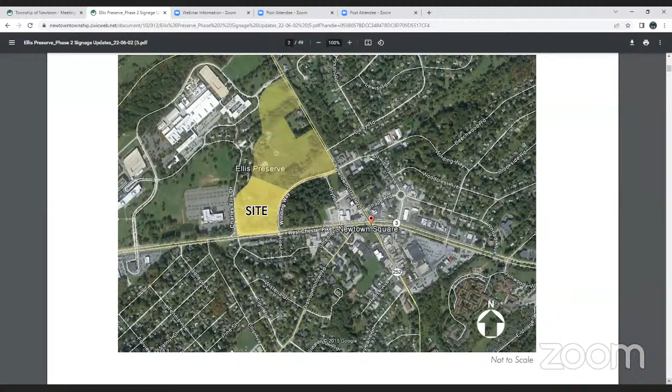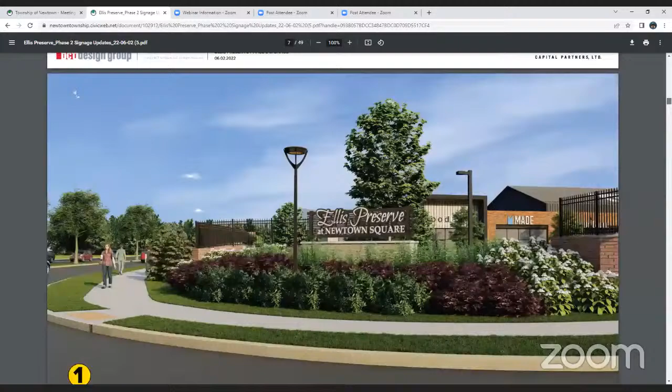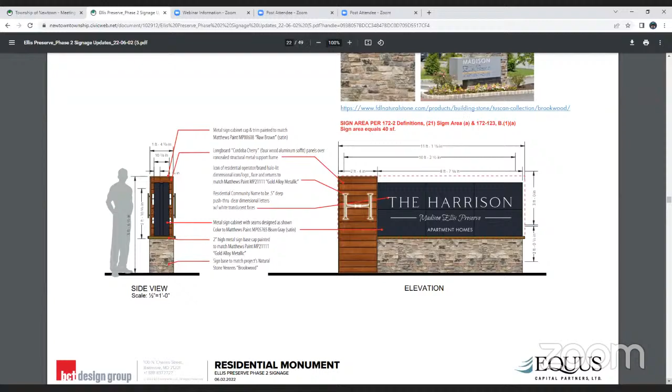They pulled up a view of the south elevation from the street showing the secondary signs in the back of the buildings, which are being tabled for now. Those areas aren't fully thought out yet; they're exploring ideas of bringing in the history of Newtown Square and Ellis Preserve. Some secondary sign locations are in alleyways and are meant to soften those areas, but they're comfortable coming back with more developed plans later. So those two areas, shown in what's being pulled up, are the secondary signage areas being pulled from tonight's discussion.

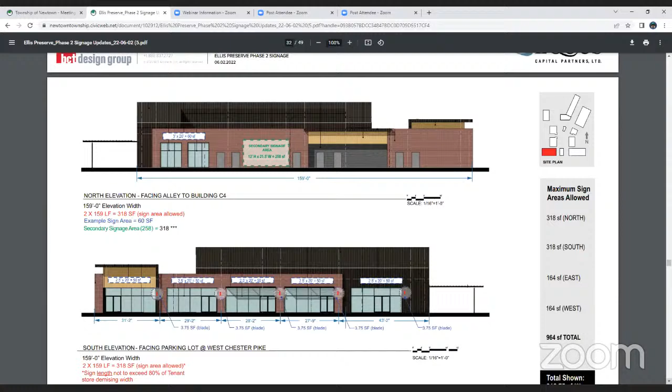They reviewed the monument signage and the view from the south elevation from the street for the multifamily building. There are two elevations, a south and a west elevation, that both have the H for the Harrison on the upper facade.

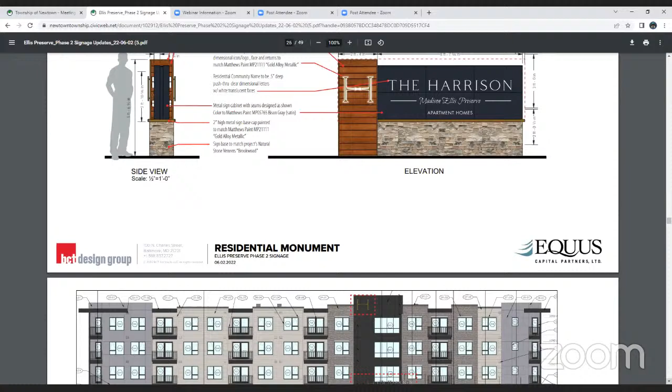Correct, not the ground sign, the residential monument sign. We're having it go the other way. Okay, there it is, right there. Perfect, all right, so that is now established.

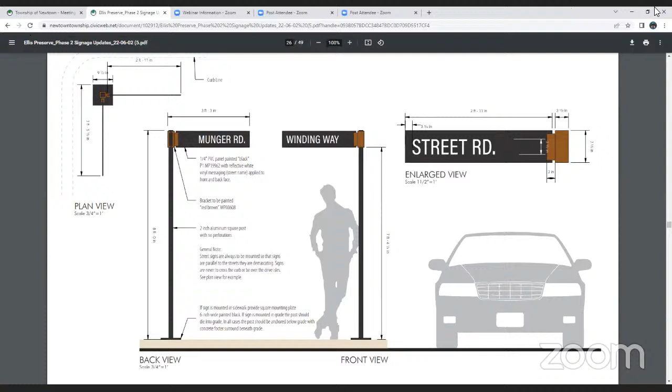Mr. Russo, I believe you had some questions. So the monument signs, there's 3 or 4 of them around the complex. They basically just have different veneer on the bottom of them, John, where we're at. So they're all supposed to have the same stone veneer on the bottom. I did notice, they look, the one looks a little different.

So there is Brendan Murray, BCI. There is the current campus signage. We're continuing that along West Chester Pike and at the end of Winding Way. But then when you get to Newtown Street and Winding Way, we are matching the retaining wall stone at that place. So, on the screen right now, that's the one at 252 and Winding Way, correct? No, that's Newtown and Winding Way. 252 and 1, yeah.

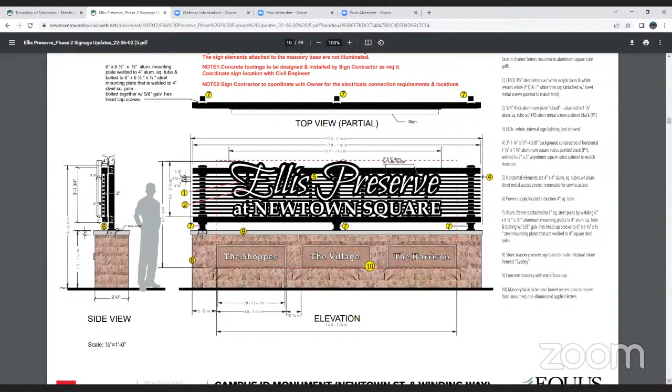It's Newtown Street. Is that what you're gonna be calling them, John? So you're dividing the 3 sections up into the shops, the villages, and -- don't move from that, you can go back to that, Steve -- the shops, the villages, and what's the other one, the Harrison? Harrison, is that what you guys are calling them? Yeah, I think the village is a placeholder at this point, the name hasn't been set. Rockwell's development -- the townhouse portion of the project.

Why have it like that for 252 and Winding Way and not on the West Chester Pike side? The West Chester Pike side represents more of the entire Ellis Preserve campus, and this represents more of the retail and mixed use. It matched -- the previous one matches more of the signage that is already existent on that side of the project.

Got it, and these signs are all backlit. They have no front face illumination -- what was that? No front face illumination, so no light will be coming forward. It is a reverse channel, so it's basically halo lit. All right.

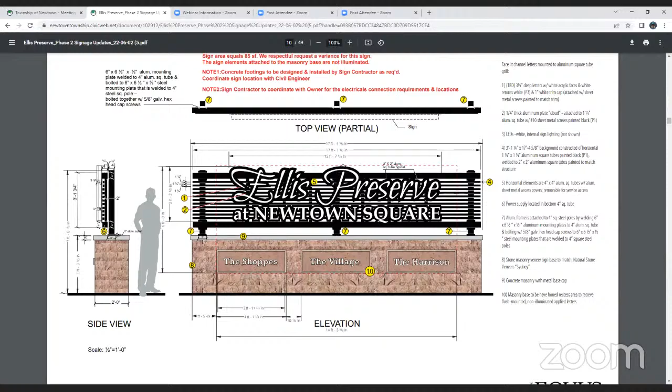Like backlit, and then the tall monument, the retail pylon, is similar to what you have already. Yes, it's a slightly different variation -- right there. Each user will have its own little placard, each tenant, similar to what goes on now at the other site. Same materials, just a slightly different proportion.

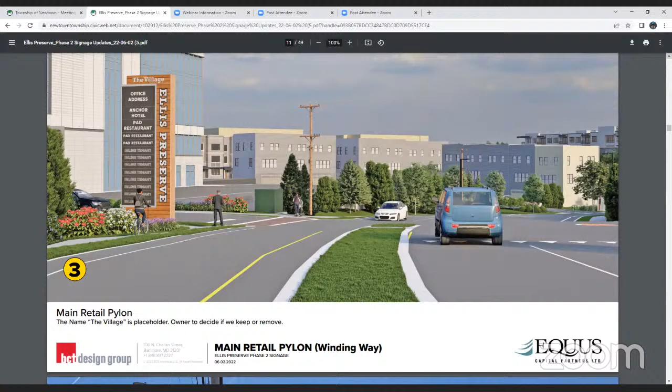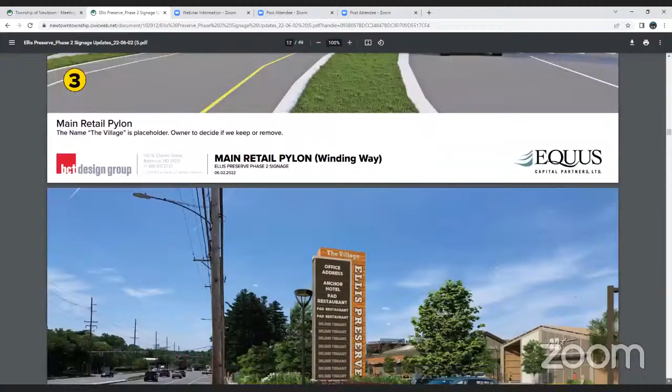Okay, and then -- you have one for the garage, and then one for Finley Catering. Is there one for Finley or two? One, it's just two different drawings.

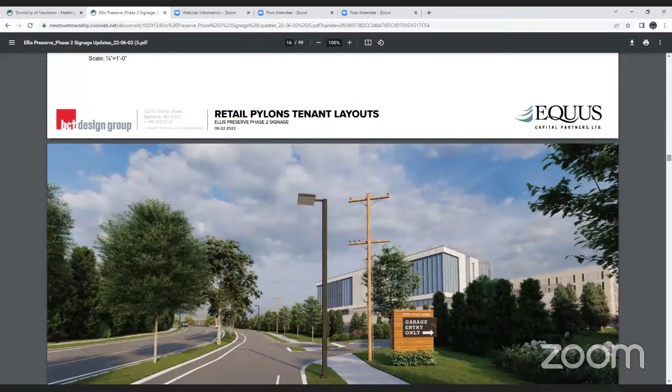Look at the Harrison House. And then when we talked about the other signs, I thought you did a good job with the different types of signs you can have across the front of the different facilities. You showed a bunch of different options depending on what kind of facade they have. There's a few different options -- you can go with channel letters, cut letters, freestanding letters, exterior variety, illuminated -- I think that was a good representation of the options we could see.

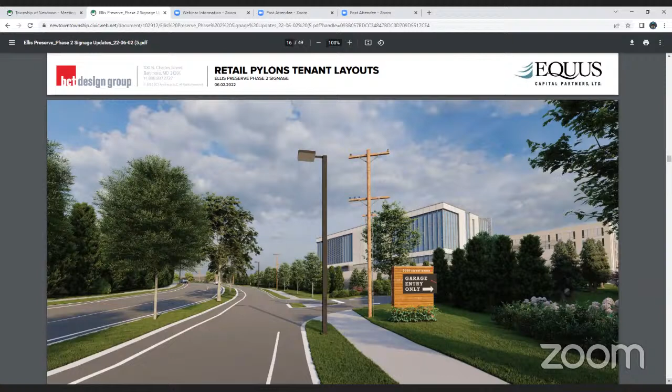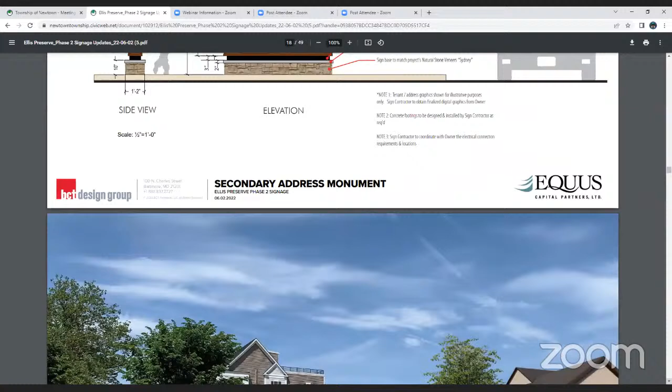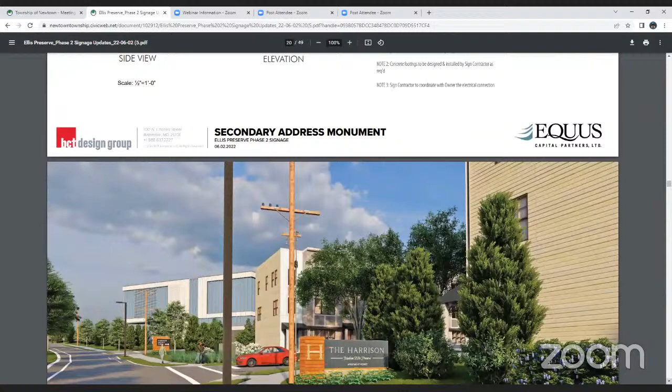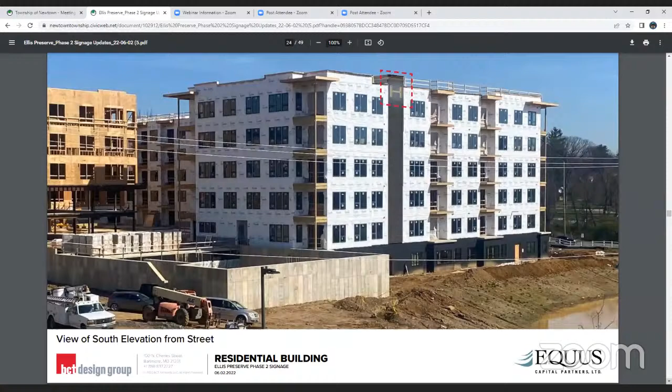So then these names are just representations -- these are not any of the tenants that are here today. Like you have Kirkland's, obviously you're not putting a Fridays in because they're all going out of business. So stuff like that is just options, examples. Yeah, okay.

Any questions? No, good.

Well, before I get into my questions, is there anything you want to show? Anything specific, or did you want us to just run through the package?

At the board's suggestion, we included renderings of exactly what the pylons will look like with the exact landscaping that will be planted in those areas for Winding Way, 252, West Chester Pike, and Charles Ellis.

This is good because all the different signage that's going to be on the front of the building is where everybody in the community will see it. There's a lot of variety—so if Sam's Pizza comes in and wants this sign, and Joe's Bar wants that type of sign, it gave us a representation of about 10 different ones, somewhere around there.

The only comment I have is going back to the one we established for 252 and Winding Way, or Newtown Street Road and Winding Way—having the shops, the Village, and the Harrison listed at the bottom.

I think it looks nice without it. I get what you guys are trying to do, but I'm not an architect, and I think it does the opposite—it actually secludes the development as opposed to it being one giant walkable community.

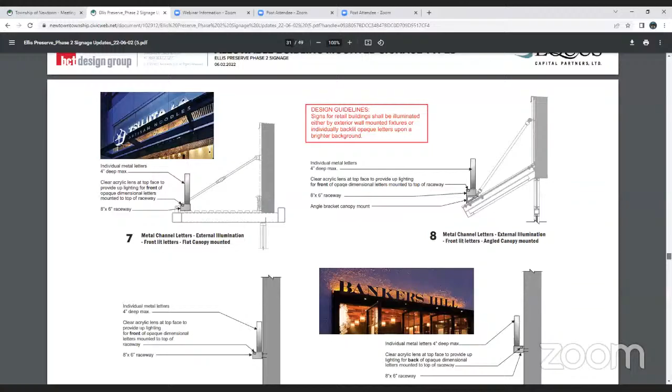I think it was mainly to serve the residential component. They wanted some signage, especially since we're taking away the H's, and some recognition at Winding Way.

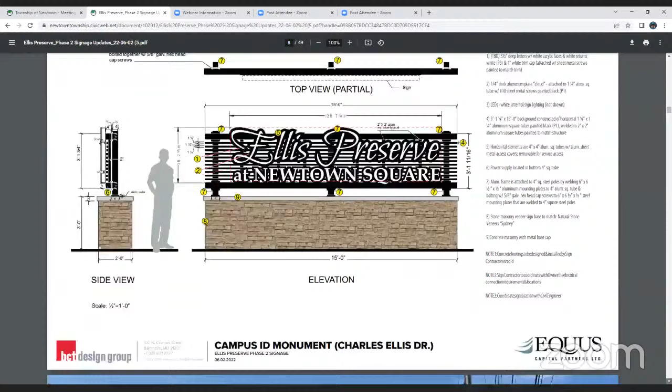They're going to see it anyway, so I don't think it'll be hard for them to know what it is. Are those going to be illuminated? No, those are just going to be like a graphic on the bottom.

Is that out of stone, or something carved? It'll most likely be a veneer matching the rest.

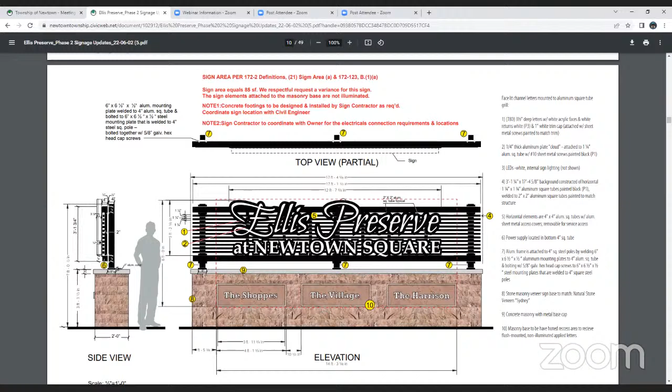So it's not going to be lit up at night or anything? My concern isn't that it's going to be lit up—my concern is that it's a lot to add there, and I think it's contrary to what we've been told, where we want one giant uniform walkable campus, unity I should say. I just feel like we're highlighting three sections.

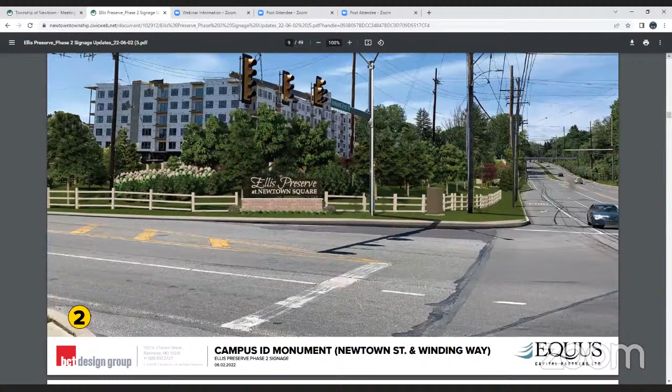Let me look at it again, we'll come back to you on that one. But I like the sign itself—the signs are nice. I don't know if we could move forward with the overall sign area as is.

Does it actually have The Shoppes, The Village, and The Harrison written on that, or no? It does. I can't see that from here though—that's what I'm saying, it's hard to see. I appreciate you doing the schematics showing what it will actually look like, as we discussed. I think it looks good.

Any other questions from the board? Just a comment—I know you're tabling the H's, but just to note: having those big H's lit up, in a community with townhomes, people would be looking out their bedroom window at the big H.

Not so desirable—I don't want it to shine into your bedroom. Not so, not so desirable.

I know you said table it, but just to clarify, those aren't front facing—they'd be backlit, like halo lit, so it's a soft glow around the edge of the sign, barely noticeable except on a dark night given the height where they're at. It's like the Batman symbol—if it lights up, someone's still going to pop up out of nowhere to save us.

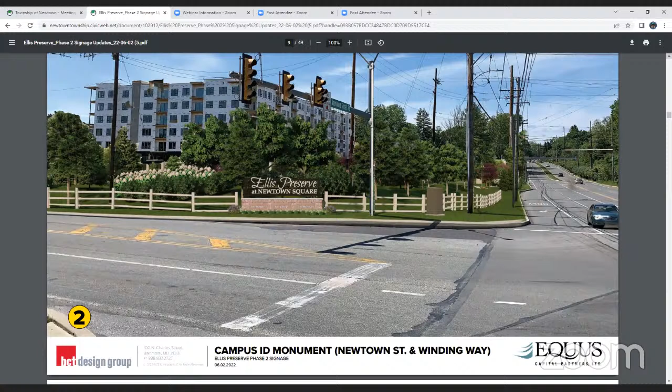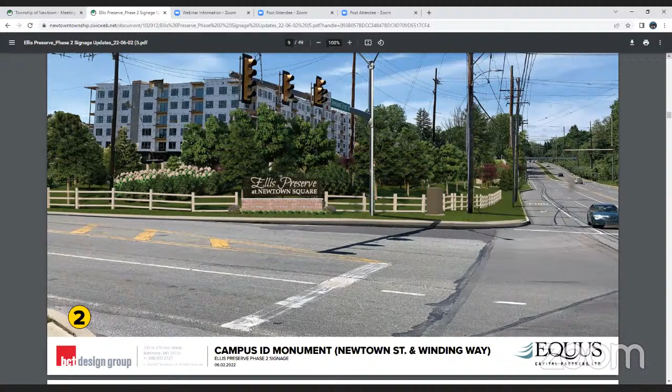And John's gonna revisit the sign 2 at Winding Way, in relation to the bottom sign. Yeah, the sign itself is individual signs at the bottom, that's fine. He's just gonna revisit that. We'll talk about that later.

So this approval is subject to submission to the zoning officer, the township engineer, and the building department.

Second. Good job, Rich. Motion was made by Supervisor Russo. I believe Suzanne, you got all that down. Seconded by Supervisor Partridge. Before we vote, is there any members of the public who want to add anything since this is a presentation?

All right, seeing none, all those in favor signify by saying aye. Aye. All those opposed? Motion carries.

We will now move down to old business 17.1, discussion and possible decision relative to BPG rendering PH2D, the new office building in Ellis Preserve, previously approved building architectural changes only.

Thank you. I have John Schwartz with me from DII Architects. John is the designer for the project. We were here roughly a month ago and had a discussion with the board on the renderings presented that night, and the board had some suggestions they would like to see. So John's here to present the updated renderings for the project.

Good evening, John Schwartz. So the first slide we wanted to show, since I know there was some question on orientation of the building, is really just to represent where the building actually sits on the site relative to Winding Way. And if you scroll up a little bit...

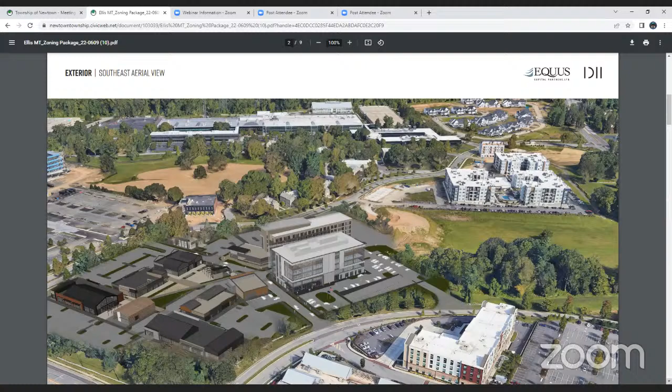You have these as hard copy or no? Did you bring any hard copies? Do you have hard copies? I didn't bring any, but I have a hard copy here. Yeah, can I just have that, John? Yeah, 'cause there's a comparison, I believe, from the original. Thanks.

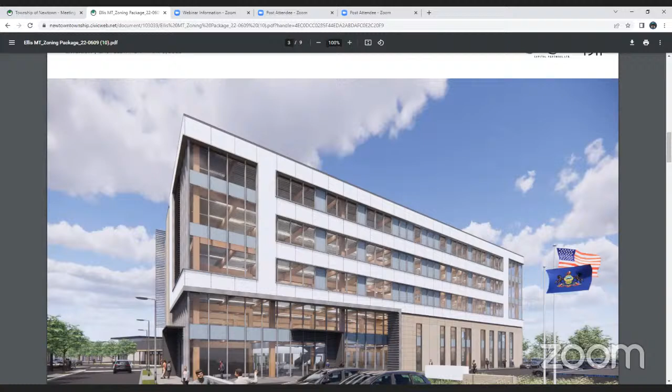The next slide shows the parking lot elevation, the east-facing elevation. So this is where we were at the last meeting. Some of the concerns or recommendations were regarding the amount of white and the starkness of the white, and I believe also the color of the base, which was a little tan.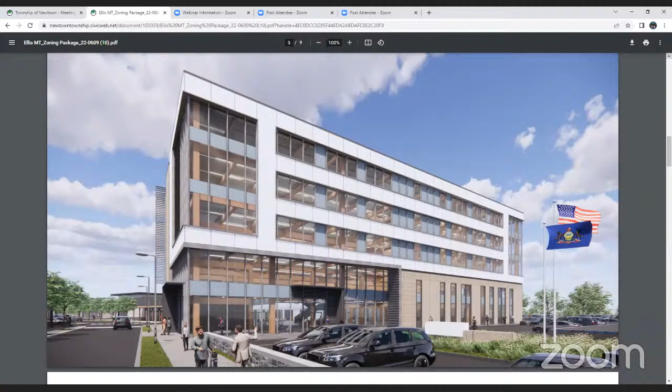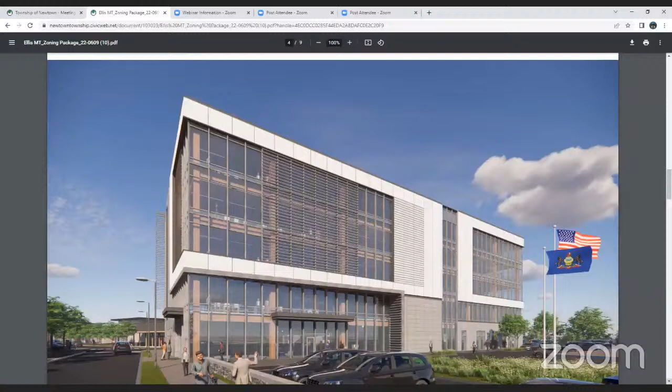We've been working with the client through the design process and evolved the elevations. The next slide will show what we did to respond to what the board mentioned. So instead of the section of white going all the way across, we've separated it, trying to break down the facade a little bit more, and also toned the base, changing it to a medium gray to kind of blend in with the white.

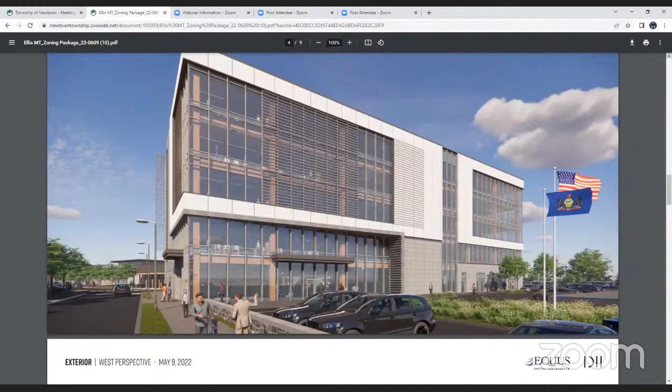Is the curtain wall wood or aluminum? The curtain wall is aluminum, but you're seeing through the glass, which will be kind of clear. The intent is that we want to see a little bit of the wood structure behind the glass, trying to celebrate the mass timber a bit.

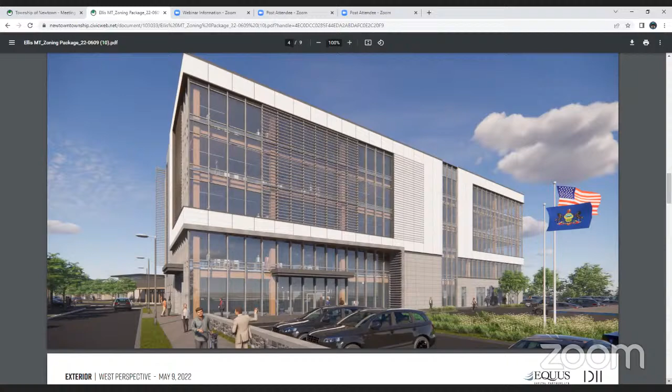Is the representation showing certain pieces of glass that are going to be darker, or is that just a reflection? Just reflections - we'll have reflections of the sky and buildings, and this is a computer-generated rendering as best as we can represent it. This is believed to be how it looks from Winding Way. Yes, okay.

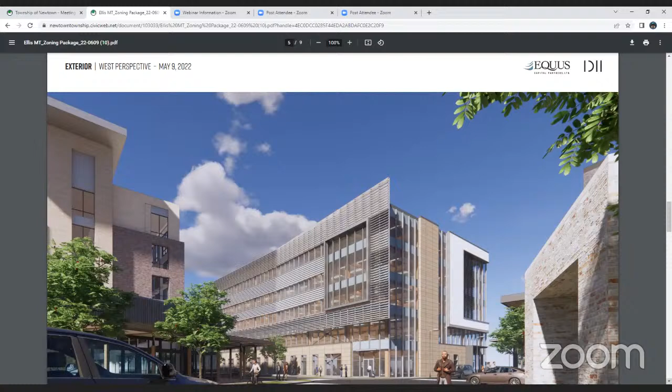So the next view was from this angle - this is the north and west side of the building, where we have curtain wall, and then in front of the curtain wall we have the brise soleil.

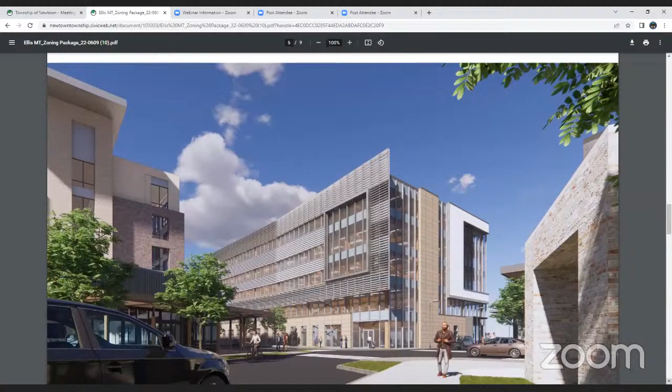The next rendering shows the same view, where we've incorporated a little bit more of the color. We got a better rendering of what the glass is going to look like, and the entire brise soleil is now in front of the curtain wall. So this is the revised version.

So part of what we're doing with the brise soleil - for those not familiar with the term, it's a sun shading system. It reduces the solar gain on your building, and we're using it as a texture as well. It's a high-tech look, but we're also going through evaluations with our envelope consultant and engineers on using the brise soleil to tamper down the solar gain on the building.

The top of that base, the upper corner - remember, that was 8 feet above the roof height, somewhere between 8 and 10 feet. We've lowered it about 3 feet, honing in on our design a bit. So it's now down to 5 to 7 feet. It actually comes across just behind the parapet and then angles up at the corner to give a little accent to the building.

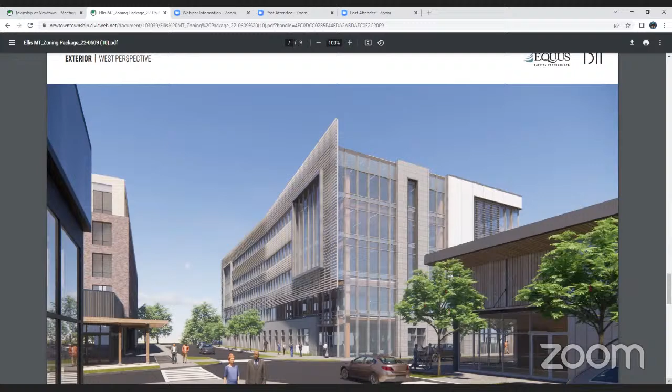So if we can continue on the next couple slides - here's a view. We wanted to juxtapose it to the height of the hotel across the street, and also give a sense of what the streetscape will be like, with the retail in the foreground.

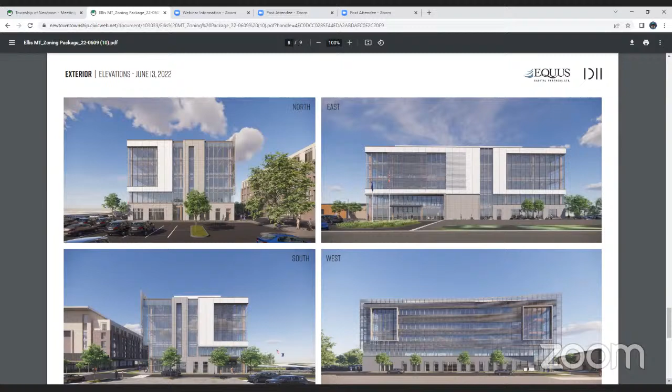And at the same time, we're using it for sustainable efforts. Is this going to be LEED certified? I don't remember where we landed on that - in all likelihood, it will not be LEED certified. LEED hasn't even caught up with the notion of mass timber, so we're too far ahead of them at this point.

But we're going to use sustainable systems on the building - mechanical, everything, yes.

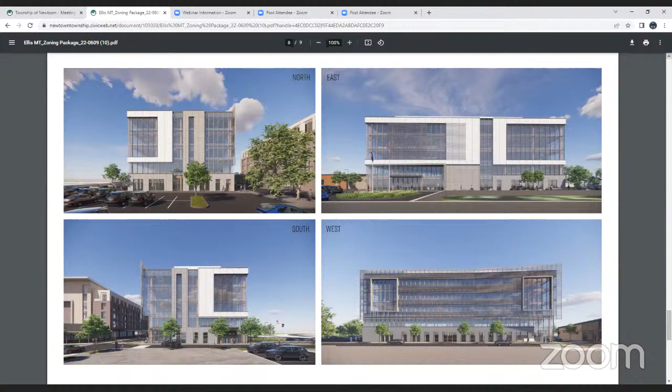The back, the west shows it real well, as does the other angle, where it just kind of hangs out. I get that the architect is trying to make it look like the New York Times building, but even that example doesn't exceed the actual structure. It's more or less just placed in the center of the building. So that's the only criticism I have.

Outside of that, based off the first rendering, I do think it looks nice. But again, that mesh screen - I don't know, I don't like that.

Yeah, I think we've spent a lot of time since the last meeting working with the architect. Obviously we left the meeting and expressed the concerns that the township had, and we really tried to work towards a middle place on this with him.

We were able to work through the issues regarding the west facade and south facade, but we really couldn't push him any further on the design of the north facade. We were able to scale it back, as John said - we took 3 feet off the height, but we're really at a limit.

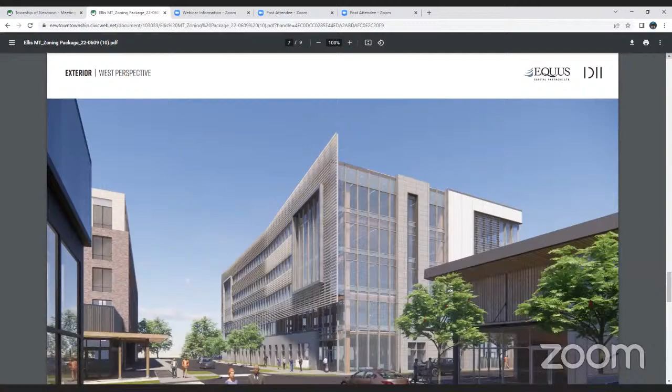Yes, so John, just orient me again with that side of the building - where is that facing? Sorry, so directly, let's go back to the first rendering, back to the site plan, all the way.

I don't know if this helps, but the curtain wall actually flies past and goes out to receive the screen, so the curtain wall system - sorry, go back, one above it. Slide 2, great. So you can see it's north facing, facing the hotel.

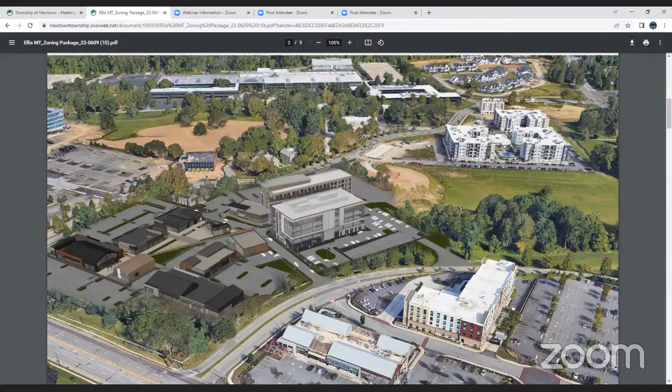The changes we were able to make are on the south side of the building, facing Winding Way and the Hilton Garden Inn. I'm good. All right, yeah.

Again, just to reiterate, the building itself has already been approved by a prior board. We're just purely looking at the architectural rendering. So with that, if there's any comments from the audience, now is your opportunity.

If not, is there a motion, or do we need a motion for this, Mr. Sokorai? I guess it would probably be best to do it that way. Is there a motion from the board? Yeah, I'll make a motion.

To approve - is there a date on the drawings? The revised architectural drawings, dated 6/13, as presented by APG regarding the new office building at Ellis Preserve.

A second? Second. Motion was made by Supervisor Partridge, seconded by Supervisor Russo. Is there any board discussion? Again, I'll give an opportunity for any public comment. Seeing none, all those in favor signify by saying aye. Aye. All those opposed - motion carries.

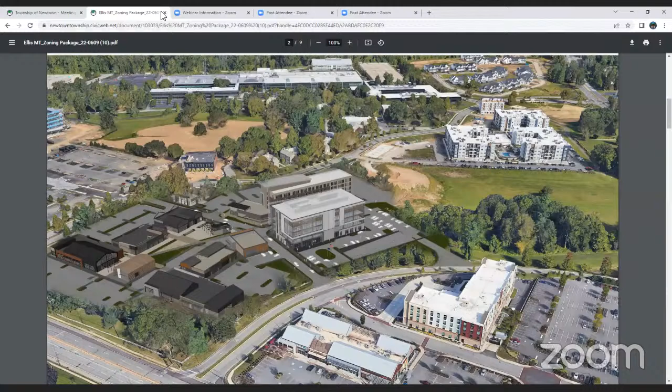Thanks for your time, thank you very much. Thank you, actually I want one of that. Thank you, let's keep the big one.

All right, with that we will now move down to section 19, board comment. Is there any board comment? Any public comment? Anybody has any public comment, please come to the podium, state your name and address for the record.

Larry Fisher, 3503 Rhodes. On behalf of the Historical Society, I'd like to thank the board, Steve Neese, George, Suzanne, and everybody in the township for their assistance with our historic Newtown Square Day. It was a great day, the weather cooperated, we had a really nice turnout, a lot of happy faces. I think it was a good day for the community and we had great support from your team - we really appreciate it. I left everybody a copy of the book.

Thank you, thank you, good stuff, Larry. And one other thing - it's not too late to become a member. Thank you very much, Larry.

There was one public comment that I failed to note at the beginning. The board did receive an email from a Kevin Carr, who lives on Ellis Avenue, thanking the board for the installation of the speed bumps. He noted that the speeding has been reduced and that they're already starting to see significant improvement. So thank you, George, and thank you to my colleagues for purchasing those temporary speed tables.